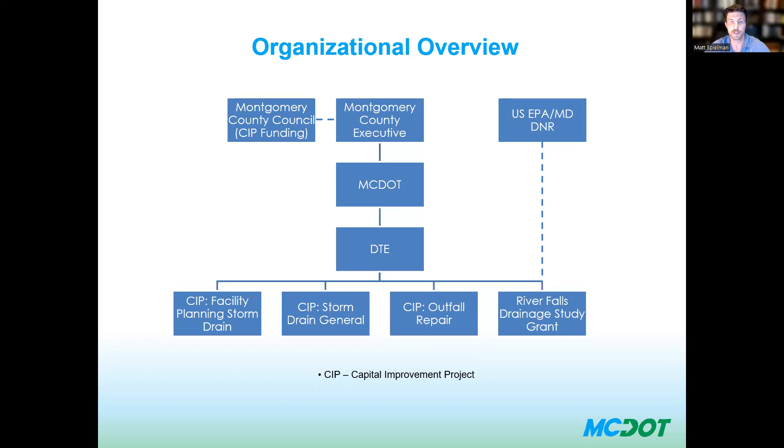This study is a completely separate funded entity from all of that. This was a separate study that was funded by a grant from the US EPA and the Maryland Department of Natural Resources. So the Community Resiliency Grant Program provided the funding. The EPA ultimately provided a lot of the funding for that, and then it was overseen by staff at the Department of Natural Resources Chesapeake and Coastal Services Center.

So what's the reason for the study? I'm sure, as all of you have experienced, there have been a lot of, or at least several, flooding incidents over the past few years. Some pretty severe flooding on a variety of streets in the River Falls neighborhood. A lot of storm drains overwhelmed, some storm drains that had actually been letting water out of the system, flooding of streams, and property damage - vehicles and homes.

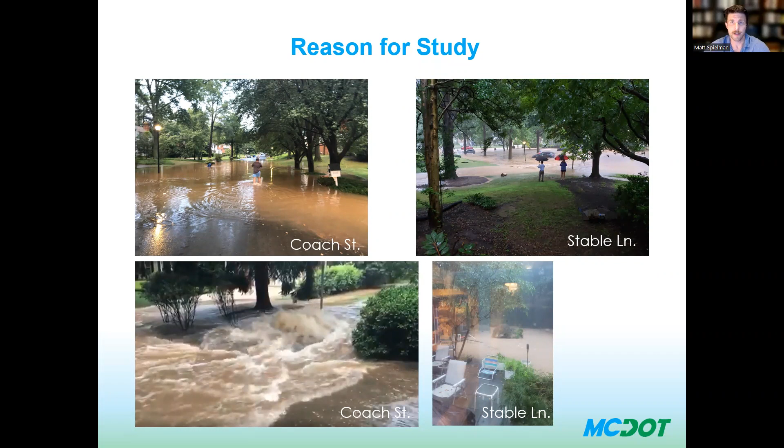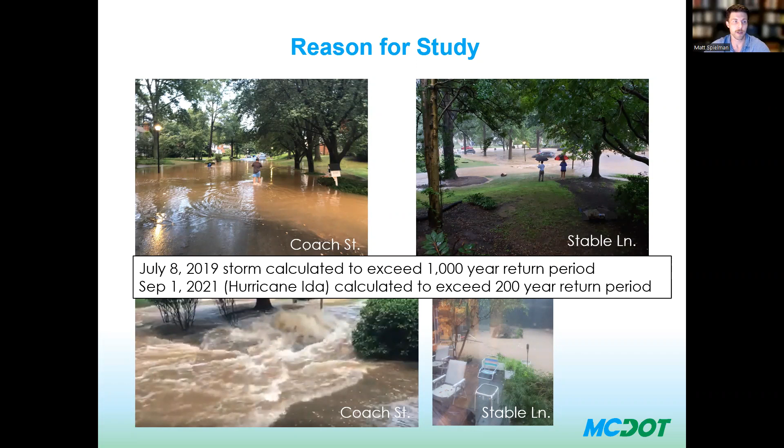So two of the real big storms were the July 8th, 2019 storm - that was calculated basically since there was such an intense rainfall within a single hour, basically it was a 1,000-year storm event, getting something like 5 and a quarter inches in one hour. The other big one was the September 1st, 2021 storm, which was Hurricane Ida, and the OEM calculated that to be basically a 200-year return period storm. Again, both of these storms, although they did not dump record amounts of water for a day, they did dump a record amount of water for a very short period of time. Both of these storms were under an hour - I believe the Hurricane Ida one may have even only been a half an hour.

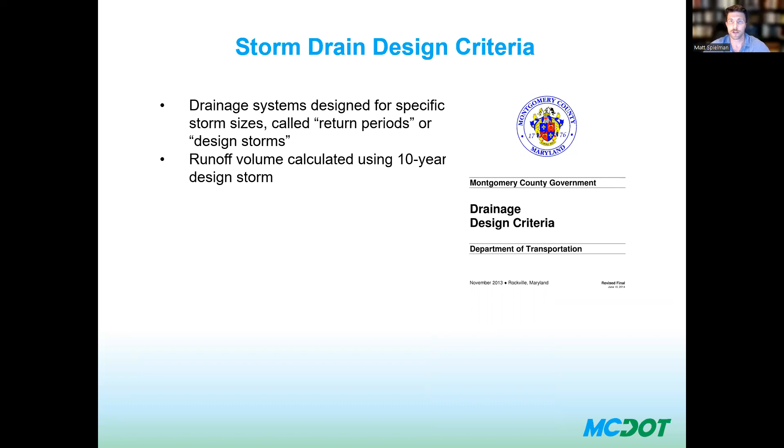In general, Montgomery County DOT designs drainage systems for a certain size return period. These are the ones you see as the 10-year or the 100-year, like you would see with a FEMA floodplain. The Montgomery County drainage design criteria currently is for the 10-year design storm.

A couple things about what the return period means: it does not mean the storm should only happen every 10 years. It means there's a 10% chance in any 1 year that a storm of that intensity could happen. These probabilities are based on past observational records, looking back in time to determine what frequency we should see from various types of rainfall.

These are based on a 24-hour storm model. So short storms that last only half an hour or an hour, if they dump the equivalent of a 10 or even a 2 or 1 year storm, but in a very short period of time, it can still exceed the storm drain design criteria.

What we've been trying to do, and we've only been able to for a couple of storms, it's very difficult to find data granular enough to do these kinds of estimates, but when you extrapolate out from a half hour, many of these storms would essentially be a 200, 500, or 1,000-year storm. There's been at least 5 storms in the past 5 years in the county with hourly rainfall significantly exceeding that 10-year design capacity, causing flash flooding throughout the county.

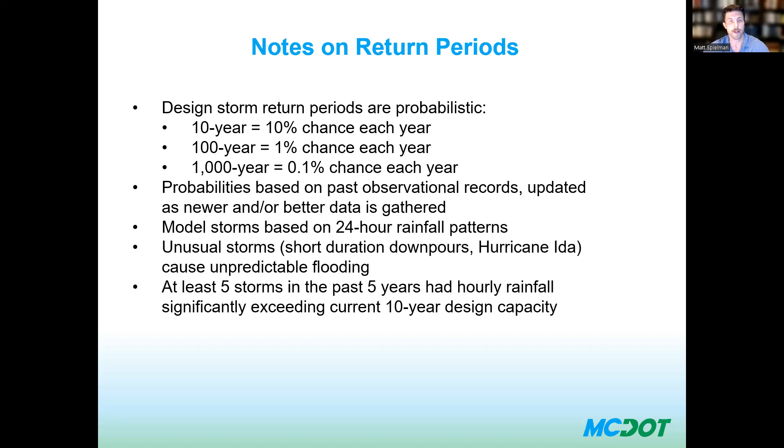So what the study is for: it evaluated the built storm system capacity and made recommendations for improvements. Just as a reminder for everybody, and for those who have not been involved yet, the funding was for the study only.

There's been no money yet appropriated for any kind of construction or additional looking into the system or design. Right now we are just going over the study. Everything from design and construction is going to be determined at a later date.

Project selection, prioritization, and funding, and the risk and severity can be reduced in the future. The scale is not yet known, but regardless of the scale, it is not going to be possible to completely eliminate all risk from storms.

We'll talk a little bit at the end about some resiliency measures you can take to make yourselves more secure during storms.

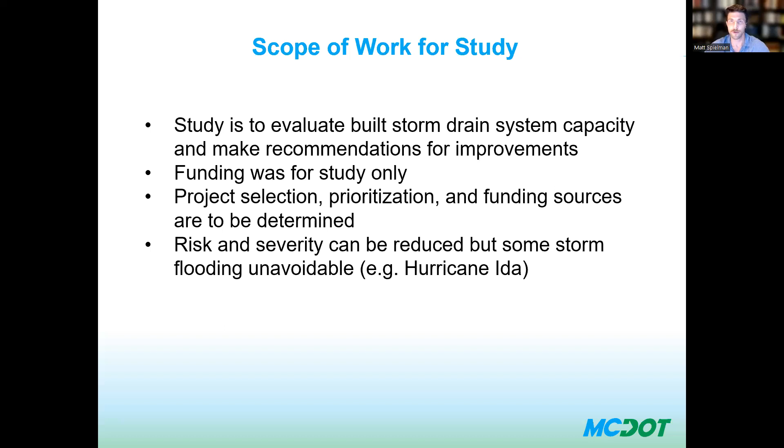The study was basically broken into 3 parts: the preliminary site assessment, done in the office with record gathering; the field data collection, where you may have seen surveyors and other staff out in the field doing work; and then the hydrologic and hydraulic analysis, which was the engineering calculations to calculate the capacity of the storm drain system compared to the rainfall we would see.

The preliminary site assessment involved data gathering: hydrology and hydraulic information, the area, floodplain data, land uses, record plats, property owners, easements and restrictions, environmental constraints, road plans, and water and sewer utilities. This was all gathered mostly from public record, some of it from the county's GIS systems.

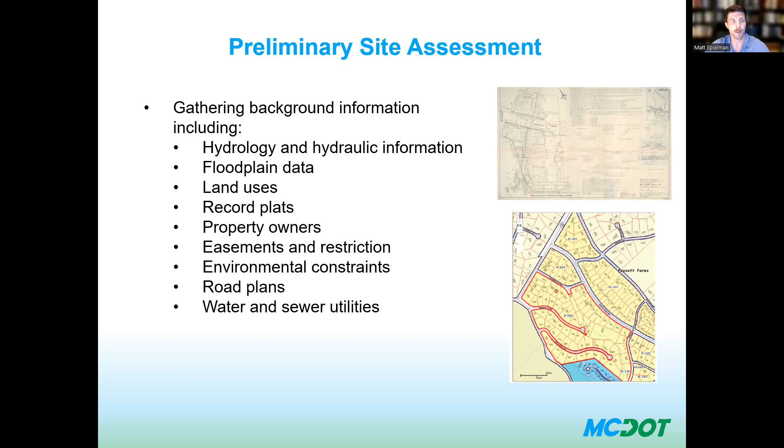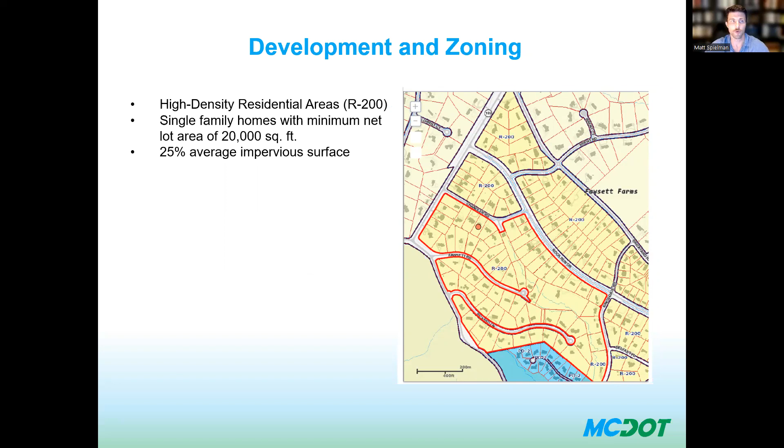Generally, the area is high density residential, R200. These are single family homes with a minimum net lot area of 20,000 square feet and a 25% average impervious surface.

The storm drain system was cataloged. It is a separate system than the sanitary sewer, which is managed by WSSC. The systems do not connect and are not allowed to be connected, so completely separate. Again, the system was installed...

About 200 different pipes, or 22,000 linear feet, about 180 structures, and multiple piped streams.

The two major drainage areas we looked at were the northern area, centered around the storm drain running down Rock Run Drive and perpendicular to the various streets in the north area, ultimately outfalling near Rock Run, and the southern drainage area with the stream running through the private conservation property, eventually outfalling near MacArthur Boulevard.

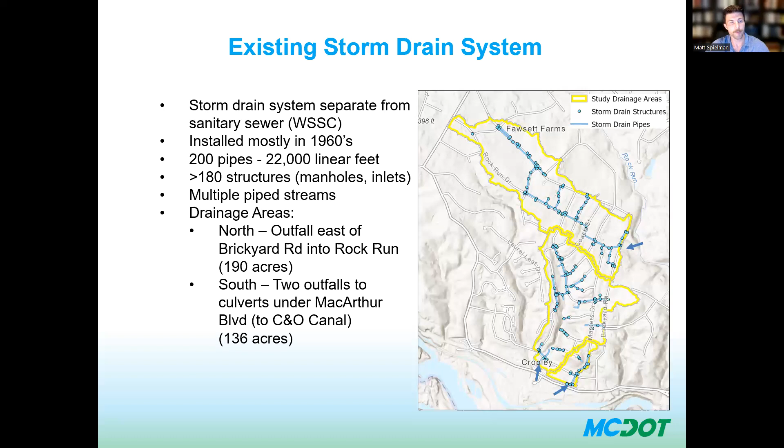In the lower drainage area, we have a few sections of D soils, which are very poorly drained. In the northern area, we have some CD soils and some BD soils.

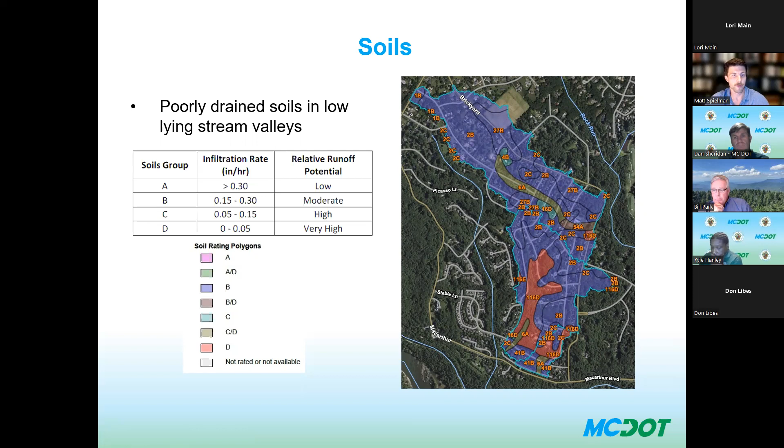So both of those areas indicate that these are where stream valleys used to be, and the water within that area is not going to percolate into the ground very well.

During the field data collection, we picked up the pipe size and condition, structure size, location, and condition. We confirmed all the drainage areas to all the different structures. This was done ahead of our field survey.

The field survey team went out and took the GPS location of all the structures. They measured the structures, did the elevations of the top, the bottoms, the inverts. The invert would be the bottom of the pipe on the inside. Then the invert elevation of all the pipes - this is what allows us to get the information on the slope and the capacity of the pipes.

We did a wetland and waterway identification to locate all of the currently existing above ground streams, and any wetlands located in the study area that might affect the hydrology. They also scoped out potential BMP locations for the best management practice, which is a quality stormwater management that we are hoping to install as part of the remediation program.

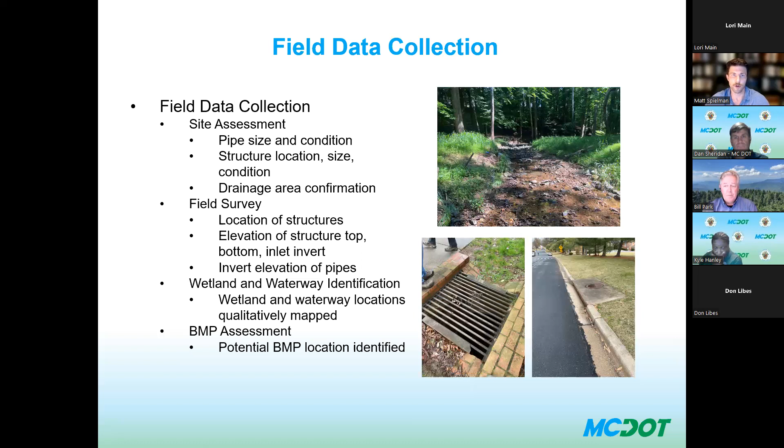This is just a quick example of some of the results of the detail of the field survey. They picked up all the corners of all the structures, all of the pipes and the pipe inverts, all the elevations and the pipe system connectivity.

There were a few structures that were not able to be accessed, either because they were too heavily buried, or they were in an inaccessible location that would have required damaging some kind of a structure to get to. That was in the very minority - most of the structures were able to be picked up.

So we have a very detailed map of the system now, and we're going to be using that to improve the county's current GIS system.

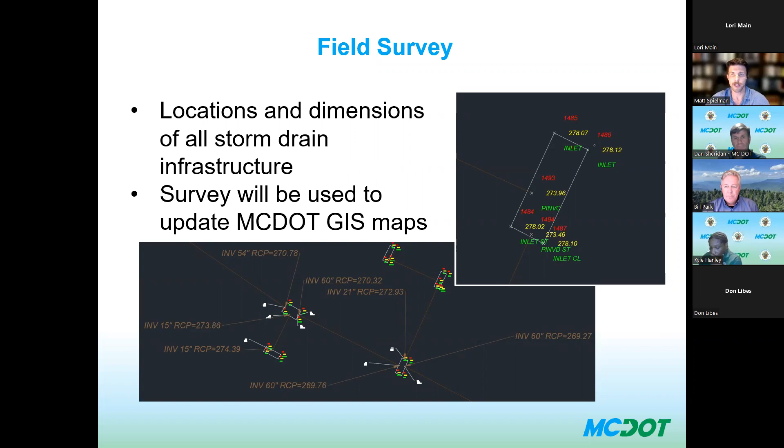Wetlands and waterways - there's a stream at the outfall down near the pool where the system running from that north drainage area, and then there's a stream that runs through the conservation property between River Falls and Masters Drive. There were a couple of very small wetlands, but for the most part, it was pretty steep, so there was not a lot of wetlands in the area.

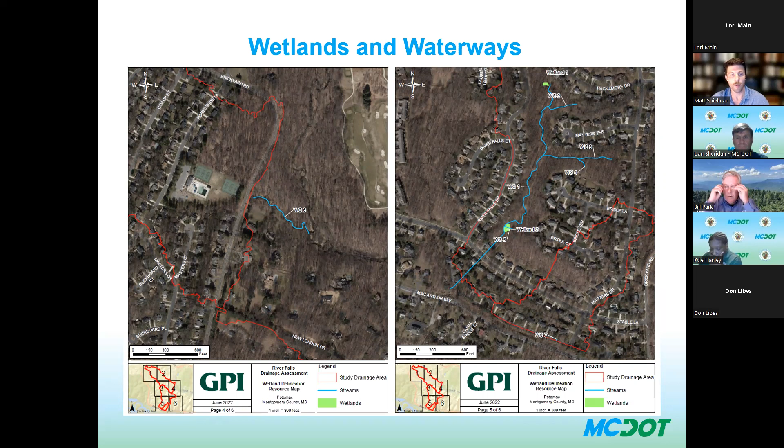They scoped out potential BMP locations, so they identified over 50 different locations that were good for BMPs. These areas are open and flat within the county's right-of-way with limited tree and utility disturbance. The soils would be tested at the time to see if they are also amenable to that kind of facility.

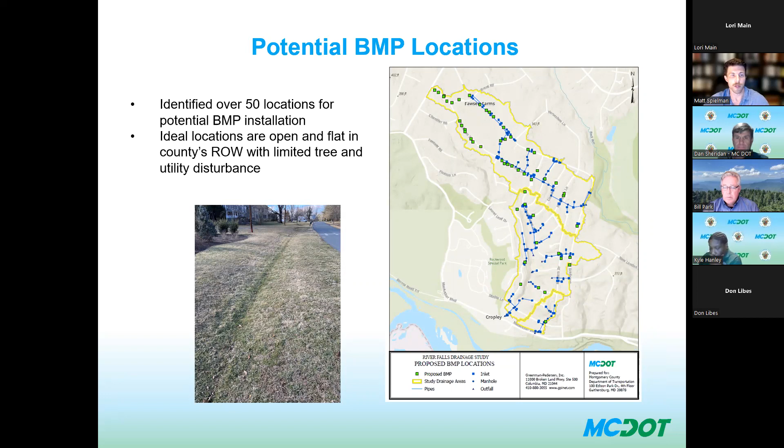For the hydrologic and hydraulic analysis, just to go over a few terms here to make everybody a little aware of the way that this is calculated. So the primary variables that we're looking at here are the drainage area - this is the area actually draining to the individual inlets.

The runoff coefficient, which is the amount of runoff basically flowing off of a particular piece of land. It's affected by the surface type - is it a house or a yard? What kind of zoning is it? What kind of soils are there, and what kind of slope?

We have the rainfall intensity. That's, as I discussed before, based on historical documentation of rainfall. So this is the typical amount for our model storm.

The time of concentration, which is the time for the runoff to flow from the most distant point in the drainage area. This is affected by piping and curbing and impervious surfaces and how quickly the runoff will turn into a channelized flow in a yard or in the street. And then finally, the discharge quantity, which is the amount of discharge in cubic feet per second that eventually ends up concentrated at our point of interest, which would be our inlets in the system.

So the hydraulic analysis then, using that hydrology for the amount of water reaching the inlet and then reaching the pipe, we would then do two different analyses. We did the closed storm drain analysis - this looks at all the individual pipe sections by themselves, whether they are capable of handling the runoff calculated to come to them, both from upstream pipes and any individual inlets at that pipe. Then we also did a hydraulic grade line analysis.

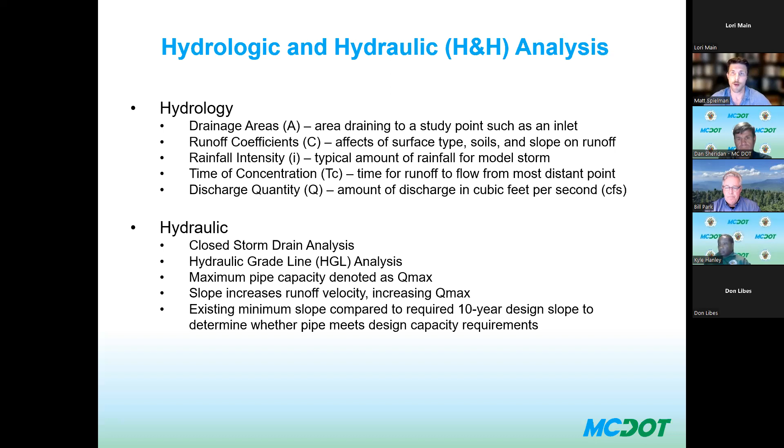For the closed storm drain analysis, slope generally increases the runoff velocity through the system, and this will increase our Q max, which is the capacity of our pipe. So when we're looking at the closed storm drain analysis, the important factor that was called out was whether the existing pipe was at a slope that could accommodate the amount of runoff calculated coming to it.

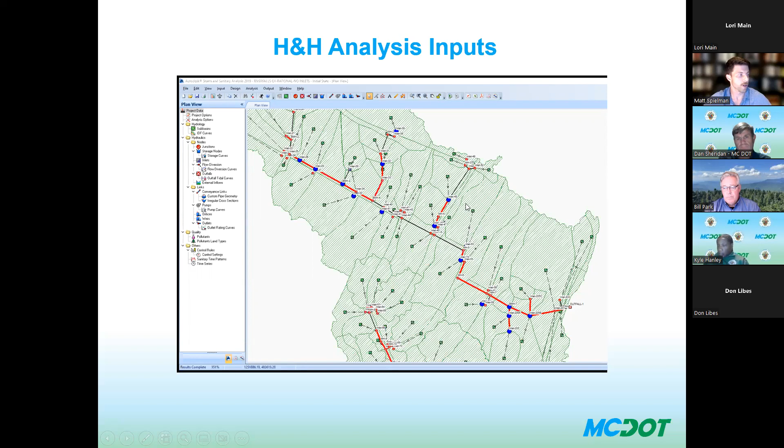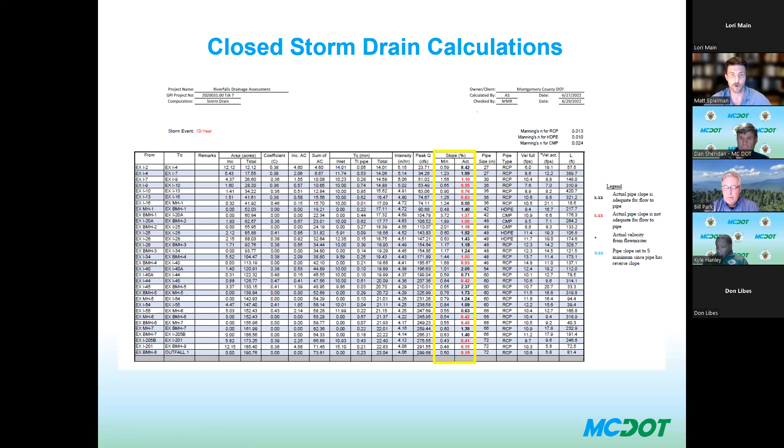This is just the other two pages. Pretty much every system in the project area had undersized pipes, except for the system that goes to outfall 7, which is down by MacArthur Boulevard and runs up to the stream behind Stable Lane. That system actually showed to be currently capable of carrying the 10-year design storm capacity.

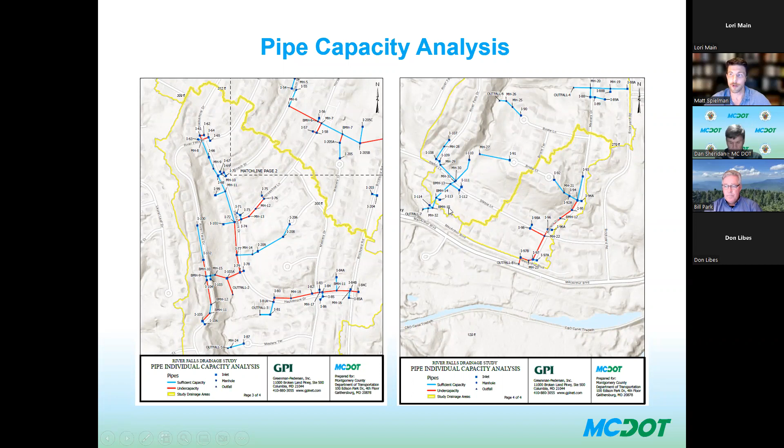This matches with a previous higher level study that we did a few years ago, looking at that system in particular, and it showed that we did have capacity in that system, which it does appear that we do. But again, that's only for the 10-year storm - larger storms may still overwhelm that system.

So then for that system, what we would expect to see with those undersized pipes and how they would affect the properly sized pipes, we looked at the hydraulic grade line analysis. This begins at the crown of the outfall pipe, which is the pipe that eventually discharges into the stream, and then runs back up the system from there, looking at the pipe loss and structure energy loss. The hydraulic grade line analysis basically accounts for pressure - it accounts for pipes in the lower part of the drainage area being full and unable to take any more capacity.

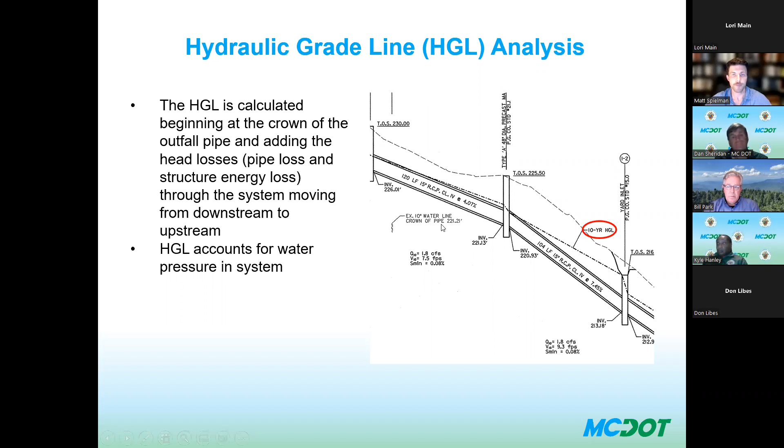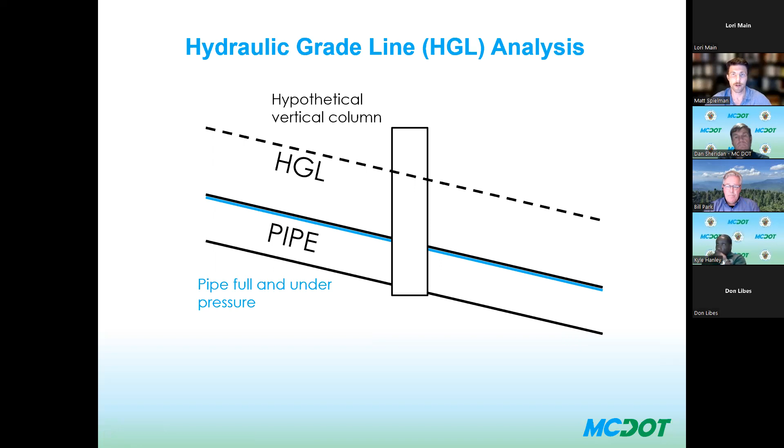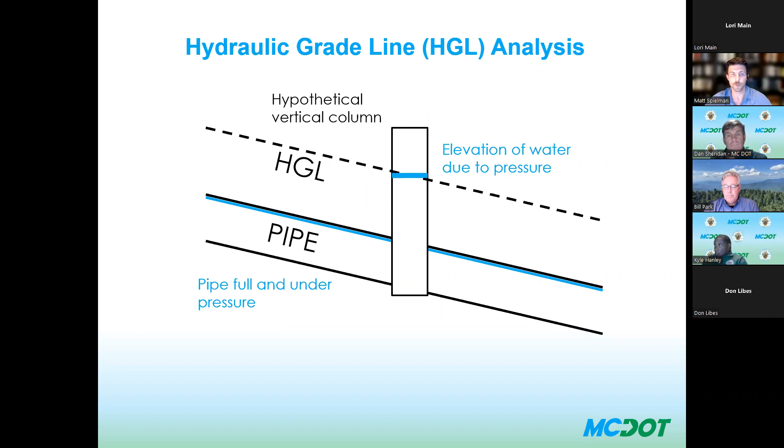Just to quickly illustrate what the hydraulic grade line means: if you've got your pipe system and you've got your hydraulic grade line, sometimes that line can be in the pipe, sometimes it can show above the pipe. Essentially what it's saying is when the pipe is full and under pressure from the system above, if you put a hypothetical vertical column into that pipe - the structure, say a manhole inlet - if the hydraulic grade line is above the pipe, that would be the elevation of the water in that structure during the pipe pressurization. So if the pipe is full and under pressure, it will actually push water up into structures above. Why this is important is that when the hydraulic grade line goes above the ground level, you would expect to see flooding, because the pipe and structure would now be completely full, not allowing the admittance of any more water into the system.

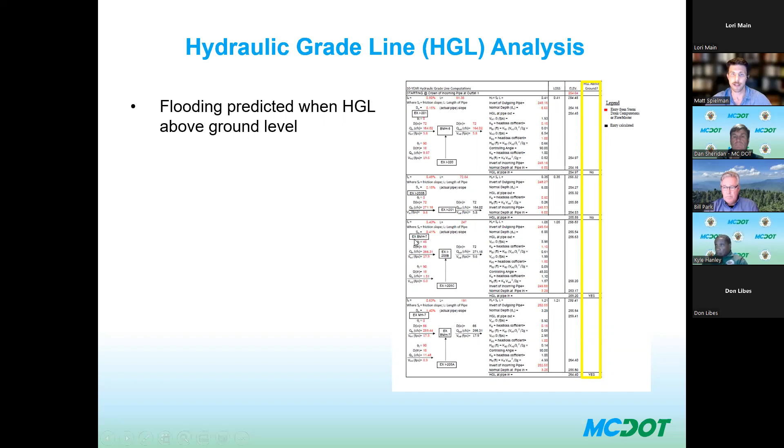So the hydraulic grade line analysis looked at all of these different pipe system sections on the downstream area in particular, and whether or not the hydraulic grade line showed above the surface, which would indicate a risk of flooding. If you look in the report, it is that last column on the hydraulic grade line analysis that indicates whether or not that is the case.

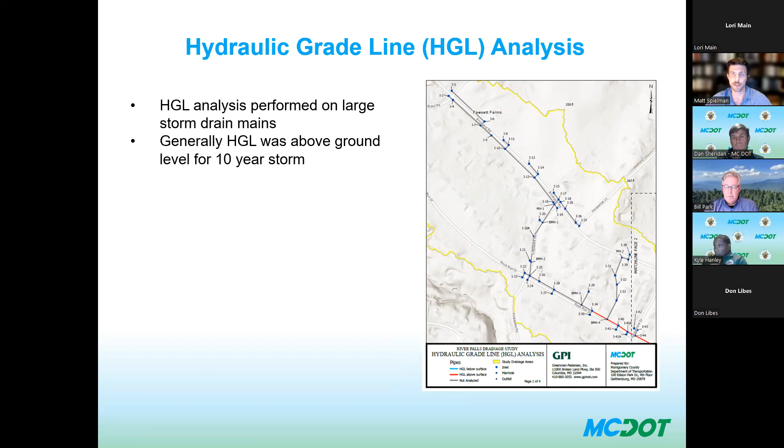And again, these maps are from the report. We did this hydraulic grade line analysis on all the large parts of the storm drain system, and it showed that pretty much the entire main part of the system from the outfall had the hydraulic grade line above the ground for the 10-year storm, meaning there is a backwater condition caused by both the stream and the larger pipes at the end of the system that are preventing the water from properly draining through the rest of the system at the desired capacity.

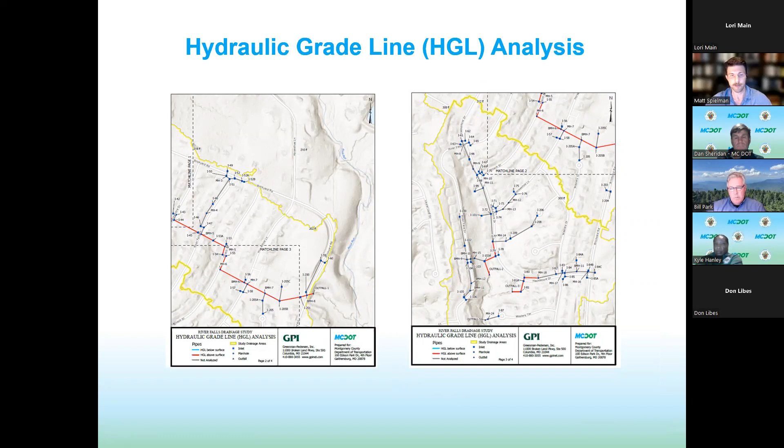So what this means is that both of these analyses showed that for the current 10-year storm design, the system does not accommodate the amount of runoff that we would like. The analysis indicated many of the sections were below the county standard, and that the hydraulic gradient for at least 3 of the outfalls showed that it was higher than the current county standards.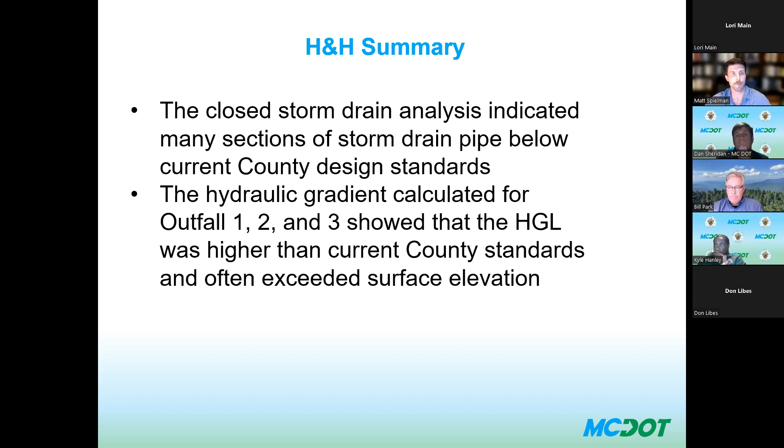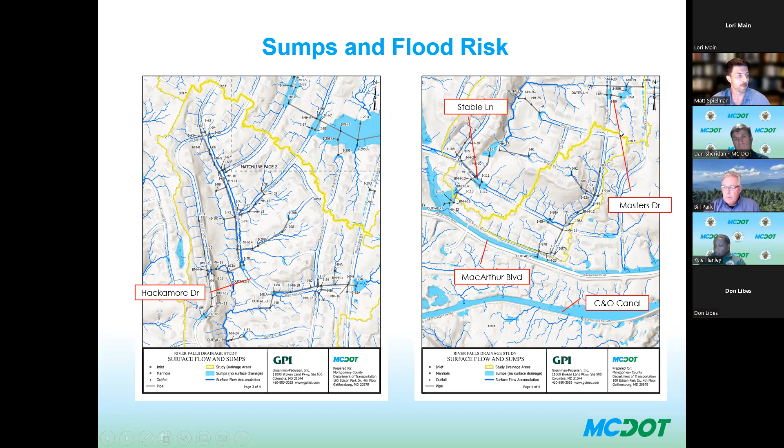So essentially, why is this the way that it is? Well, both of these systems used to be natural streams. Natural streams generally have wide banks. They've got broad floodplains. They've got a lot of room for the water in a large storm to spread out. When you convert this type of a system, a natural stream system, into a pipe system, you've now set your maximum capacity to whatever your pipe is, and everything else flowing during a larger storm over the surface is going to run into places it's not really meant to go.

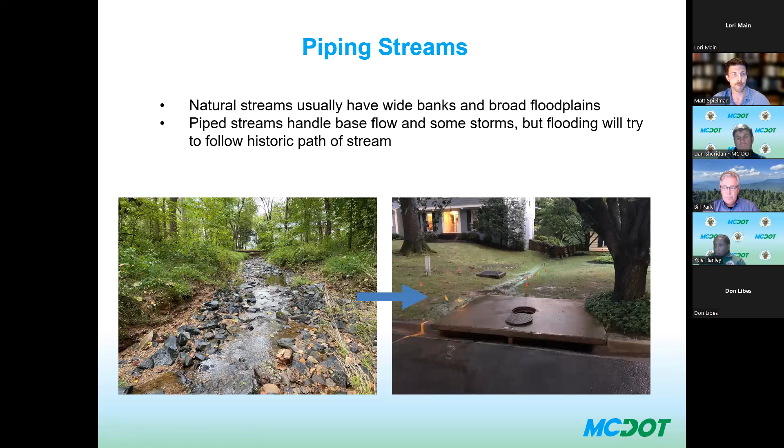And some of you may have seen this before. Looking at the old neighborhood plan, they actually showed the old stream, which ran right through all of these, perpendicular to all of these streets. When they installed the neighborhood, they put in this storm drain system pipe to replace that stream. And this is where we're seeing most of our flooding.

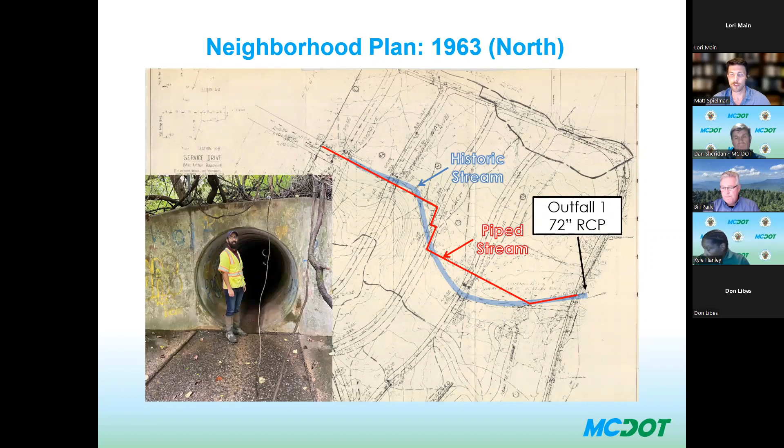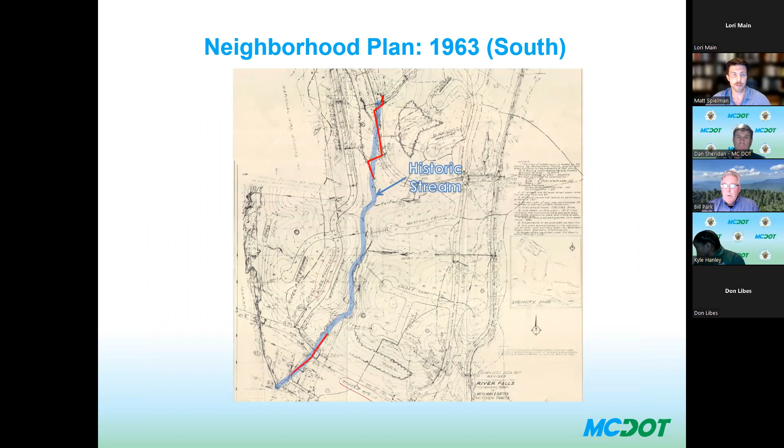Same thing within the south. There was a historic stream that ran down through the neighborhood, which is now piped only in several sections, with the ultimate end of this pipe being a 66-inch reinforced concrete pipe discharging into the stream near MacArthur Boulevard.

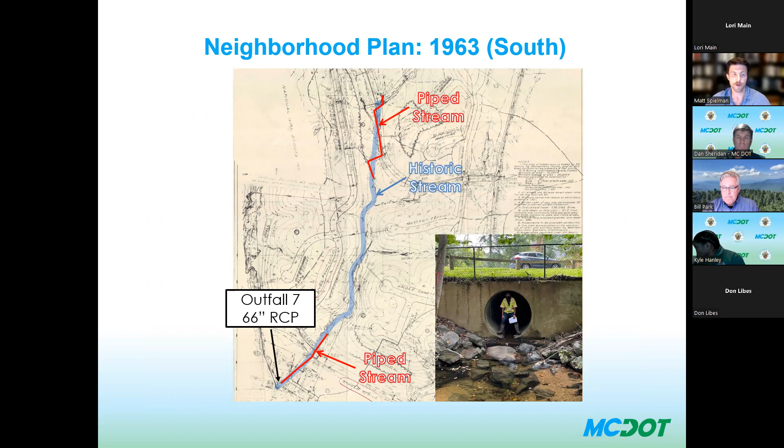So for the conclusions: significant portions of the storm drain system are below the 10-year design criteria. The pipe streams perpendicular to the roadway with sumps from which runoff cannot escape. We've got a system now where a stream has lost all of its original topography and is attempting to convey through a fixed capacity pipe. Anything above that capacity as designed is going to flood. Unfortunately, the current system does not even meet our current 10-year design criteria, although we cannot exactly say what it would have been at the time of construction.

The cost estimate based on installing a system to meet the current 10-year design standard was essentially $3.7 million. The recommended BMP build-out, for water quality and also some upstream infiltration and retention, was estimated at just over $2 million.

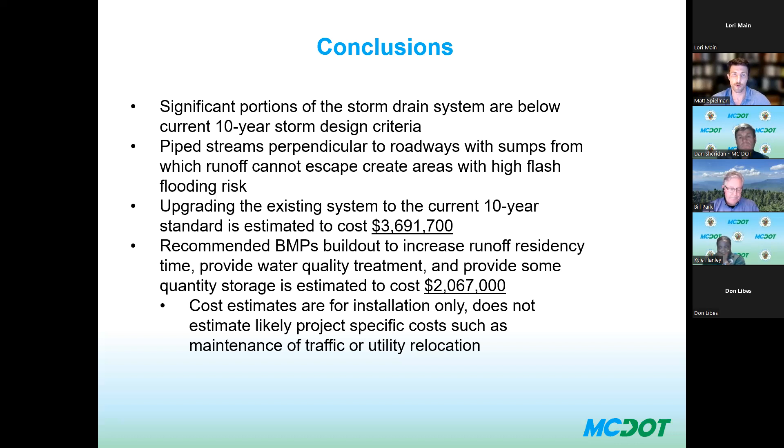These cost estimates were for installation only, so this is essentially just for putting those pipes or those BMPs in the ground. There are a lot of other project-specific costs that were not calculated, things that would require a lot more research, such as utilities and soils, plus any kind of traffic control, which were not figured in. So this is a baseline cost. Any project we pursued would be more than that if the entire recommendation were to be implemented.

So what are we going to do about it? Over the next 6 to 8 months, DOT is going to evaluate these recommendations to determine the most impactful improvements. The current budget does not allow anywhere near the entire recommended improvement to bring this up to the 10-year storm standard. So we're going to look at the individual improvements that could be made, including installing some upstream BMPs. These are primarily for water quality, but they do provide some residency time for runoff and allow some infiltration. Every little bit helps, and they could definitely reduce some of the issue.

We're going to look at some strategic pipe replacements. We'll look at those pipes that are either most undersized or are causing the most backup to the system above, and see if there's a decent way to replace a few of those pipes to upsize them, increasing the overall capacity and functioning of the system without completely replacing it.

We're going to look at adding additional inlet capacity. There were a lot of inlets that were smaller that could have been increased in size, although if the pipe is at full capacity, that would not help. Getting the water into the system as fast as possible is important, and if we can increase inlet size, it can reduce flooding time by allowing water to enter the system more quickly. In some areas, the pipe capacity may actually be above the inlet capacity, so we could get a little bit of additional capacity out of increasing inlet size.

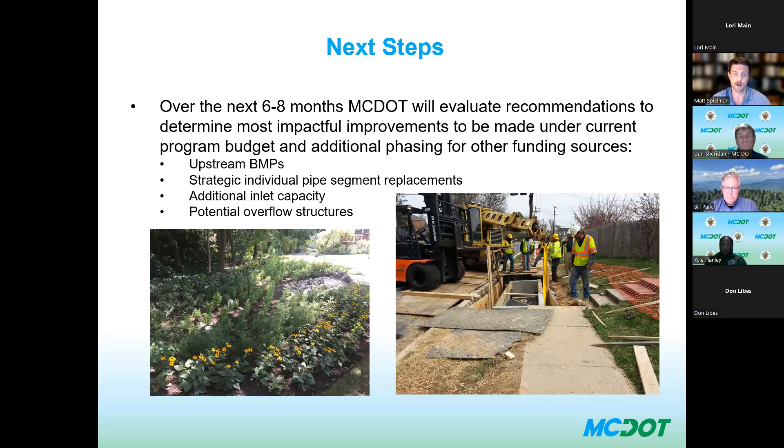We'll also look at potential overflow structures, attempting as best we can, within those sump areas, to provide a safe path for the water to flow over the surface, avoiding residences and other property damage.

Just to talk a little bit about a couple projects already done: we had a project above Stable Lane that was a pipe realignment to try to reduce clogging primarily. It didn't actually increase the system capacity, but it did increase the efficiency of the system and its ability to avoid clogging.

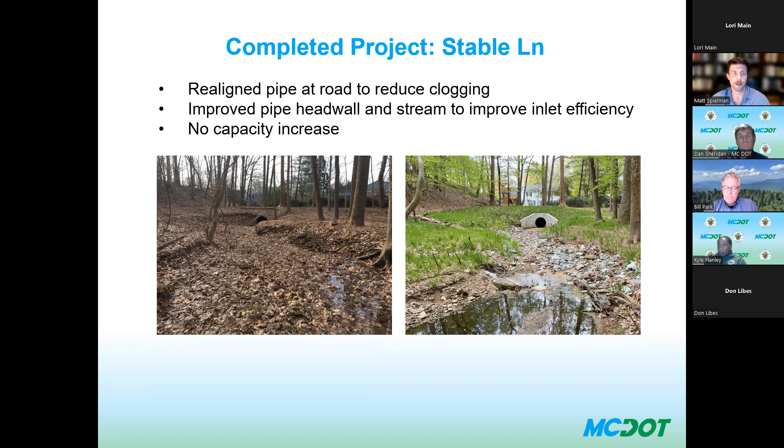We're about to go into construction for the unclogging of the MacArthur Boulevard culvert. We're at the very last stages of permitting. Once those final permits are in, we can put it onto the construction schedule with the construction contractor.

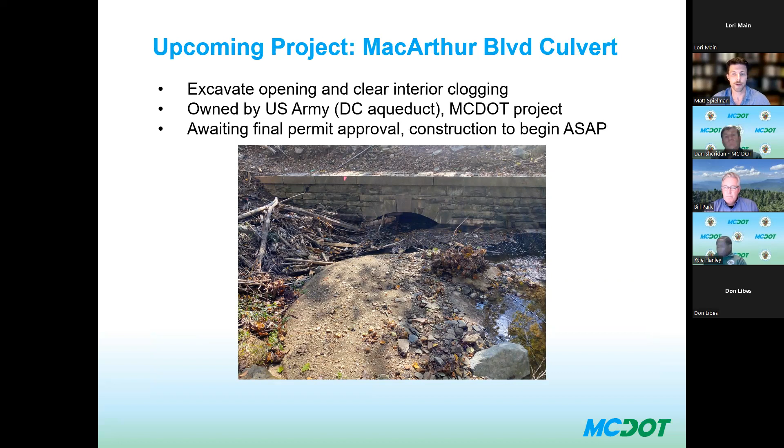Just to give a couple examples of some BMPs: these are some that have been done elsewhere in Montgomery County, Arcola Avenue, Kemp Mill, a few places where we've got some median-type systems, bioretentions, and curb bump-outs extending into the travel lane or shoulder lane. This does sometimes reduce parking, but it can both reduce the amount of impervious surface by removing some asphalt out of the street, and also provide a place for water to store and infiltrate.

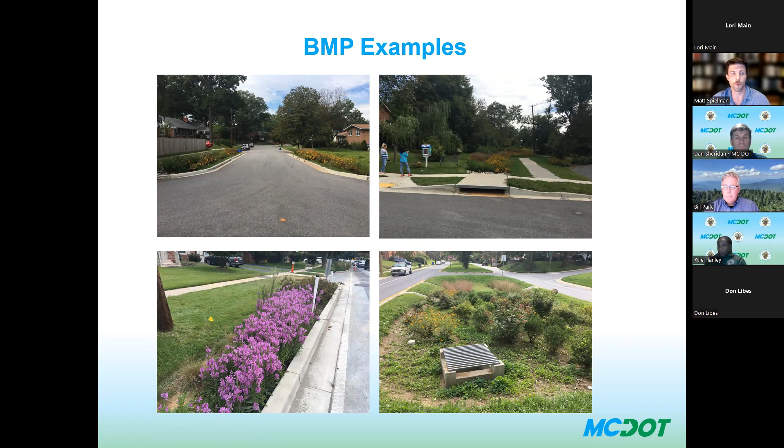So these are some practices we're going to be looking at throughout the neighborhood to install as much as possible, to improve both water quality and the residency time of the runoff. And again, everybody in the neighborhood can assist with this.

Every house produces runoff, every impervious surface produces runoff—patios, roofs, everything like that. It is best for everybody in the neighborhood, as much as possible, to help increase the retention time of water on your property. If you don't already have stormwater management, any new houses require it, but installing it will definitely help the system downstream.

So putting in things like rain barrels, rain gardens, even tree planting—again, you can go to the Montgomery County website to the Rainscapes program. That's a program through DEP. They offer some financial matching for certain types of stormwater management, so I'd definitely recommend checking that out. If you don't have any stormwater management on your property, putting it in would help all of your neighbors and yourself to reduce the issues.

And then preparedness—again, we are going to attempt to look at the best solutions moving forward, those things that can be done under our current budget, and those things that might need to be pushed off to another capital improvement project or some other kind of grant funding. But regardless of what happens, there's no way we can install enough stormwater drainage to completely eliminate the risk of any flooding in the neighborhood.